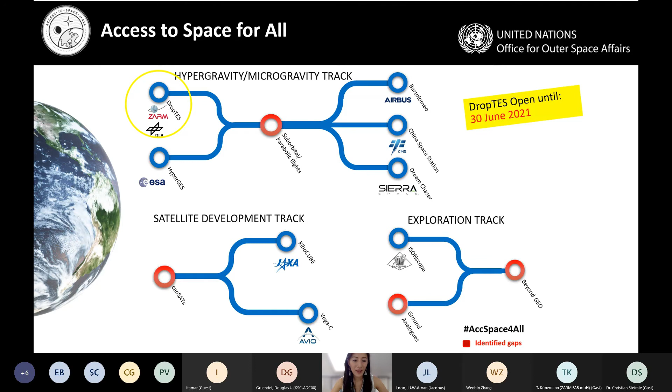So now I'd like to get into the contents of today's webinar. We will be introducing our 5 opportunities, and our partners will be giving us more details about that. I'd like to give the floor to our first speaker, starting with our ground opportunity. We will be beginning with DropTES. I'd like to give the floor to Mr. Thorben Könemann of the Center of Applied Space Technology and Microgravity, ZARM. So Thorben, you have the floor.

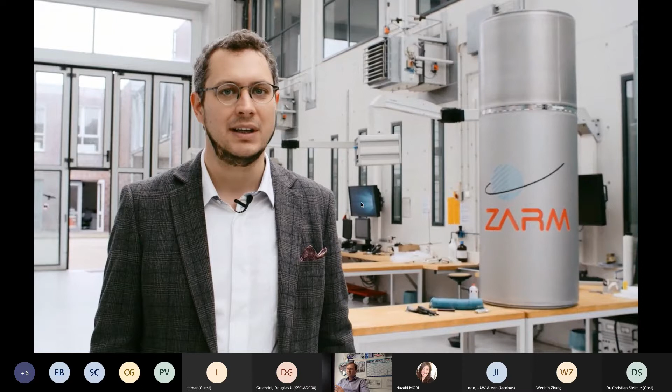Welcome to ZARM, the Center of Applied Space Technology and Microgravity at the University of Bremen. Here we are operating the Bremen Drop Tower, a large microgravity lab using the principle of free fall for experiments under conditions of near weightlessness. But how do we use free fall for microgravity research? What would happen if I had scales stuck to my feet and jumped from a diving platform into a swimming pool? It would show almost 0 kilograms because I'm in free fall. The only weight shown on the scales would be the result of the air drag.

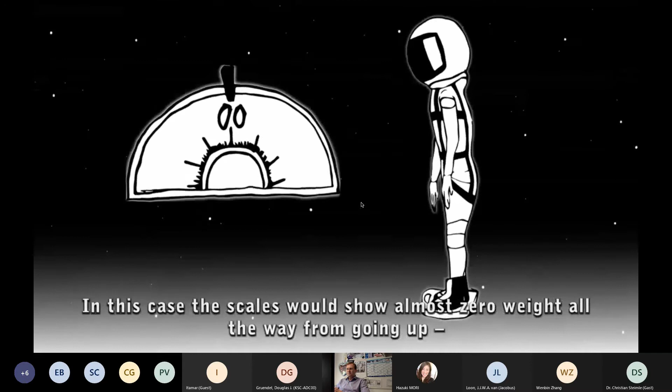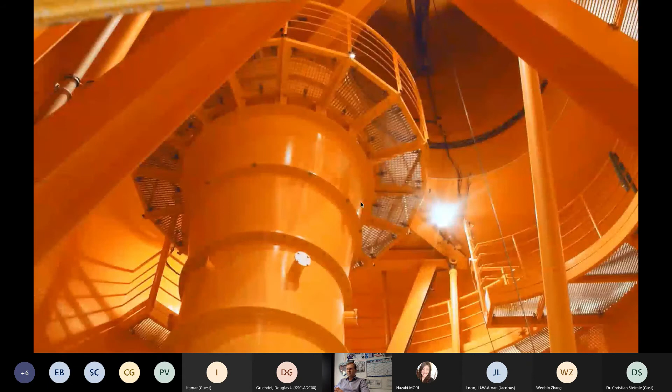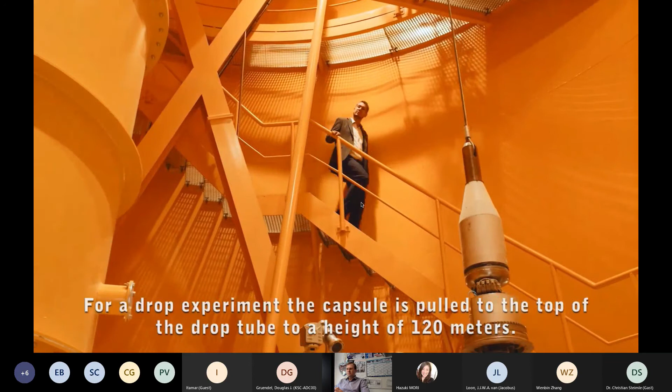We could observe exactly the same reaction of the scales if we were jumping on a trampoline. In this case, the scales would show almost 0 weight all the way from going up to falling down again on the trampoline. And now we will see where the microgravity experiments take place. For a drop experiment, the capsule is pulled to the top of the drop tube to a height of 120 meters. From there it drops for almost 5 seconds before it lands in a container filled with tiny polystyrene balls, like these.

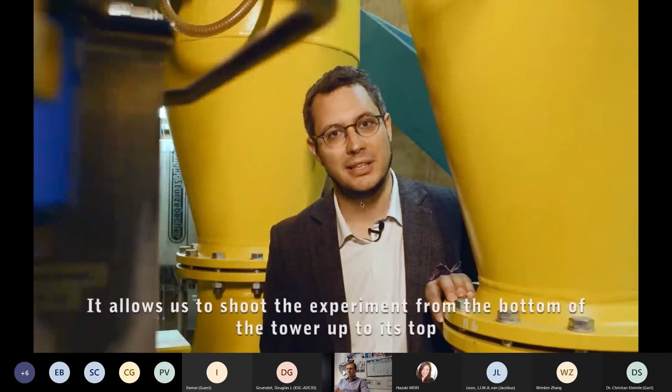The most extraordinary feature of the Bremen Drop Tower is the catapult system. It allows us to shoot the experiment from the bottom of the tower up to its top, from where it falls down again into the deceleration container. This way, instead of 110 meters for a simple drop, we can use a distance of 220 meters for free fall, providing a microgravity duration of almost 10 seconds, unmatched by any other drop facility worldwide.

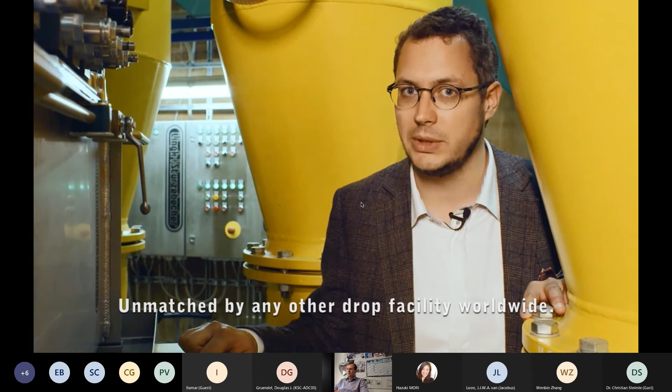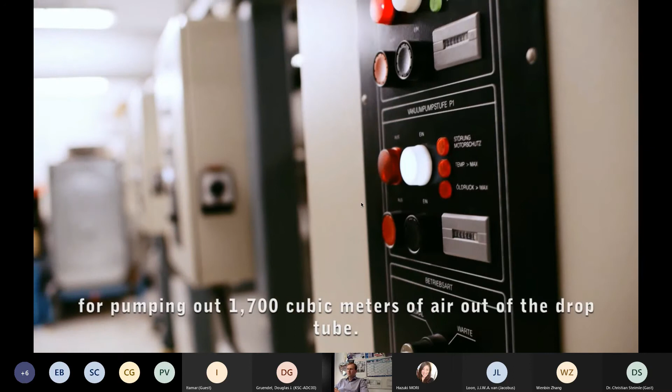Another important feature is the fact that the free fall takes place in a vacuum. It takes these vacuum pumps 1.5 hours for pumping out 1,700 cubic meters of air out of the drop tube. Thanks to this procedure, we can eliminate the air resistance almost completely and achieve a very high quality of microgravity. The experiment takes place in only 1/1,000,000th of Earth gravity.

Teams from all over the world and from all kinds of scientific fields come to Bremen to use the drop tower for their experiments. And the demand for experiment time is high. This is why we built another drop facility using a completely new technology which allows us to carry out hundreds of experiments every day. Stay tuned.

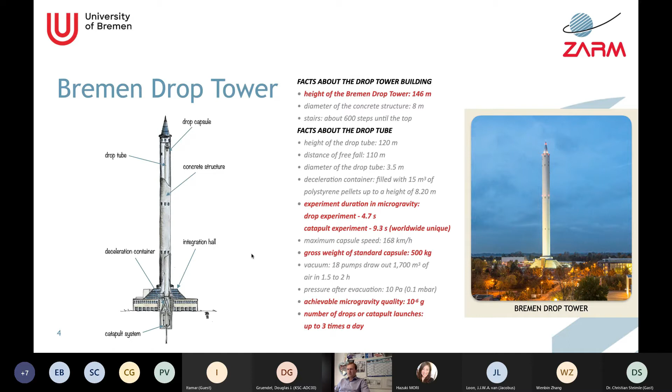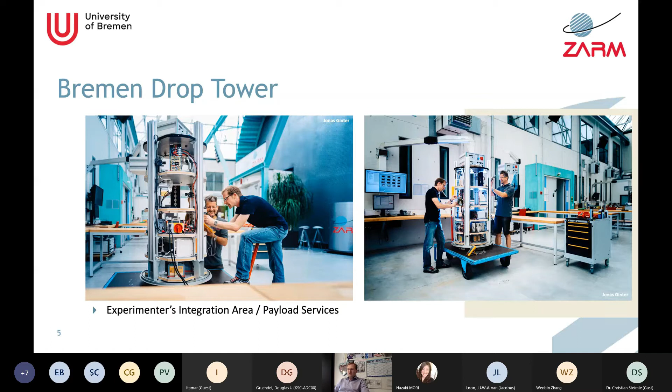What we provide you also is an integration area, tools, hardware and so on. The campaign usually starts 1 or 2 weeks before the first launch or drop. You arrive with your hardware, and we integrate your equipment into our capsule structure. We provide different platforms, and we mount your hardware devices on those platforms. This is our payload service. Each experiment is accompanied by one mechanical engineer and one electronics engineer, so you can rely on our expertise to bring your experiment into the right state for microgravity experimenting.

Here is an overview of the different versions of capsules we provide. They differ in payload masses and size. We have the short drop capsule and the catapult capsule, which differ only in the outer structure; the payload dimensions are the same, only the payload masses differ. And then the longer drop capsule with a larger payload area. Each capsule is equipped with our CCS, the capsule control system, a real-time computer system to give commands to experiments, and between the ground control station and the capsule we have permanent communication and telecommand. Each capsule also has a battery pack, since during the free fall you need power to experiment.

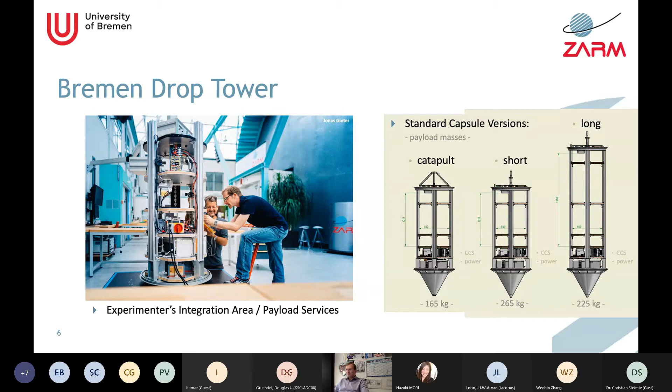An overview of the research areas and some facts and figures. We started with the Bremen Drop Tower in 1990. Up to now, we have performed almost 9,300 drops or catapult launches. A lot of different types of experiments have been integrated, and usually you have access to our facilities through our frame contracts with DLR and ESA. That means you write an application to those agencies, or you apply through DropTES.

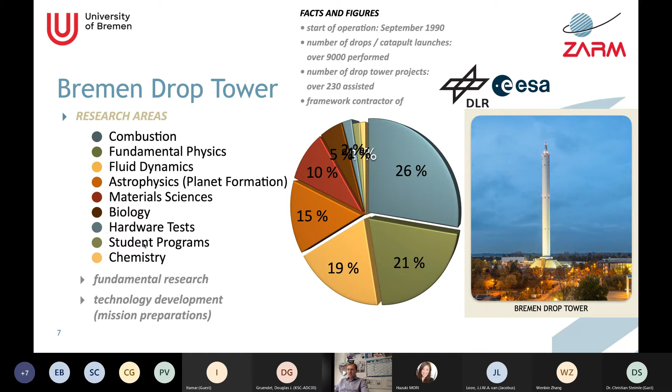Here are the different research areas. Nearly every research field is possible, mainly fundamental research, but also technology tests. They are sorted by the number of drops so far: combustion, fundamental physics, fluid dynamics, astrophysics, material science, which needs a little more microgravity time, as well as biology. Then dedicated hardware tests to prepare space missions, chemistry, and of course student experiment programs at the Bremen Drop Tower. We have Drop Your Thesis, a program similar to DropTES, which I'll talk about in a few seconds. We are also involved in REXUS/BEXUS, the European program launching rockets and doing balloon experiments from Kiruna, Sweden, where we are responsible for the German part.

As mentioned, DropTES. DropTES is a UNOOSA Access to Space for All initiative. It's an annual science activity at the Bremen Drop Tower, located in Bremen, Germany. It was first initiated in 2014. The 7th round is ongoing, and the call for the 8th round is open until this month. Involved are UNOOSA, the DLR Space Agency, and the hosting institution, ZARM.

It's dedicated to student research teams from UN member states. It allows a real microgravity research project, and the topics can be accommodated in the students' bachelor, master, or PhD thesis. DropTES follows space project guidelines, and most importantly, each winning team will have the opportunity to do 5 drops or catapult launches at our facility.

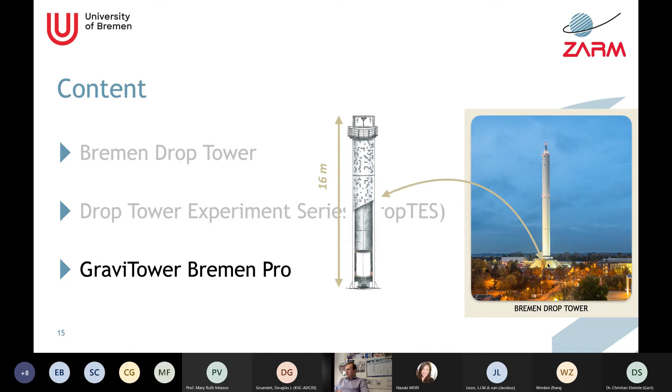Coming to the end of my presentation, I would like to introduce you to the GraviTower Bremen Pro, the next generation drop tower system, which is currently under construction in our integration hall. This is a 16-meter high tower, which is connected to the concrete shell of our drop tower and accommodated, as I said, in our integration hall. Here you see it. This new facility can provide over 12 experiments per hour. Due to the limited height of 16 meters, we are able to provide only 2.5 seconds of microgravity.

But this is an active drop tower system, a rail-guided system. For this, we use a rope drive with hydraulic winches to pull this slider or cabin up and downwards to achieve an acceleration phase, then the microgravity phase, when the capsule, a standard drop tower capsule, is detached inside the slider, and the deceleration together at the end. So you have a free-falling part with these 2.5 seconds.

Another mode is possible also with this facility, where if you have a clamped mechanism between the cabin and the release and caging mechanism, we call this device here with the experiment capsule, then it's also possible to achieve Moon and Mars parabolas, so-called partial G, so levels between 0.1 and 0.9 G. What I'd like to emphasize here is that the standard capsule can be used. So we have a lot of synergy effects with our drop tower.

That means, for instance, you can test the parameter in the morning, 12 times the hour in the GTB Pro, then identify the right parameter for a catapult experiment, for instance. Then you have 9.3 seconds in microgravity. So there's a high flexibility between all modes: drop mode, catapult mode, as well as GraviTower GTB Pro mode.

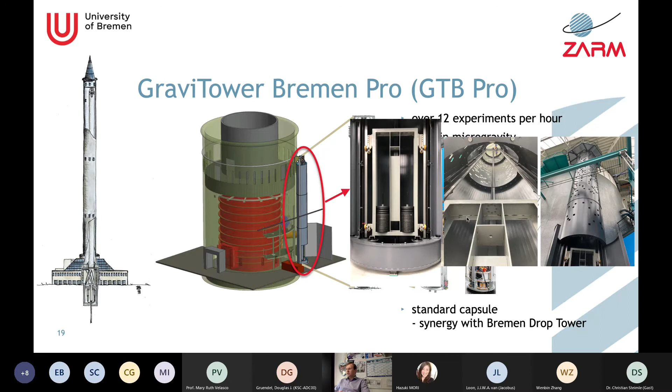What are our next steps? At the moment, we are finalizing the software, which is also very special, because scientists can operate this facility. You will get a control desk to operate the GraviTower on your own, so it's more or less a lab device for you. The slider and the subsystems are currently under manufacturing. You see here some parts, and this will be finalized in August this year. The complete tower will be tested in September, and we expect at the end of September and beginning of October that the tower is ready for the first utilization of external experiments.

I would also like to emphasize that first of all, we simulated all activities of this active drop tower system, and the drive dynamics are much better than expected, so we are very confident to provide you a very good system with less vibration and disturbances during the flight than you might expect for an active system. Also, this capsule is a free-falling one, so you have no influence from the rail-guided system.

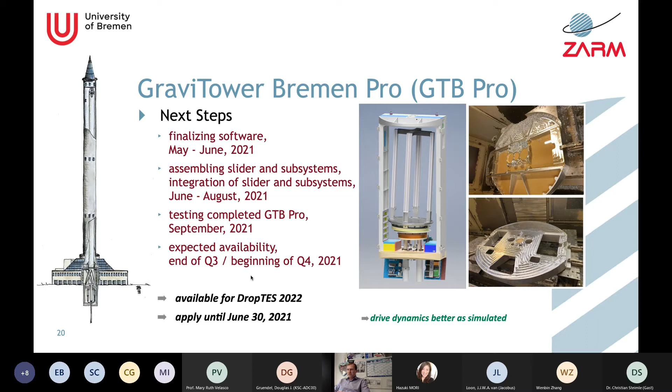Once again, this facility is also available for DropTES, so you can think about partial G experiments, for instance, and the high flexibility can be that you decide to do some tests in the GTB Pro, and you can also use drop or catapult launches from the 5-flight contingent you will get. So there's a lot of flexibility, and I must only say apply until the end of June, and we are looking forward to your proposals.

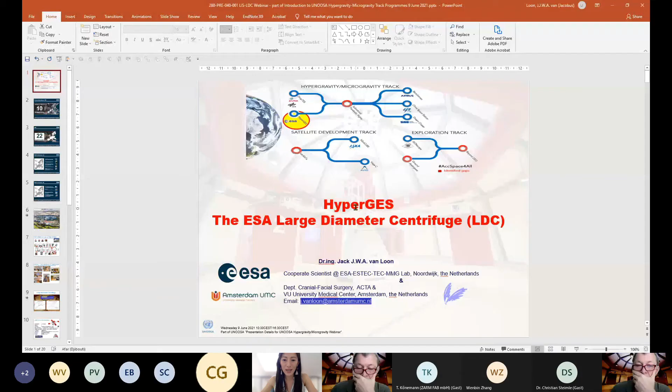I'd like to explain something about the HyperGES program and the ESA Large Diameter Centrifuge. I'm working for the European Space Agency and am also affiliated with the Free University Amsterdam in the Netherlands.

Something about ESA, the European Space Agency. It started off in its official form in 1975, with the 10 original member states signing up to ESA you see here in Europe. And then quite some years later, 2020, we have 22 member states, and it's still increasing as we speak.

ESA has various entities distributed all over Europe. Headquarters is in Paris. You have Earth observation activities near Rome. The Technology Center, which is the largest center of ESA, is in Noordwijk, the Netherlands. You have the Operations Center in Darmstadt, the Astronaut Center in Cologne, the Astronomy Center and Data Center also in Madrid, the Center for Commercialization and Partnership in Oxfordshire in the UK, in Belgium there's part of the ground station network for ESA, and of course the launch facilities in French Guiana in Kourou.

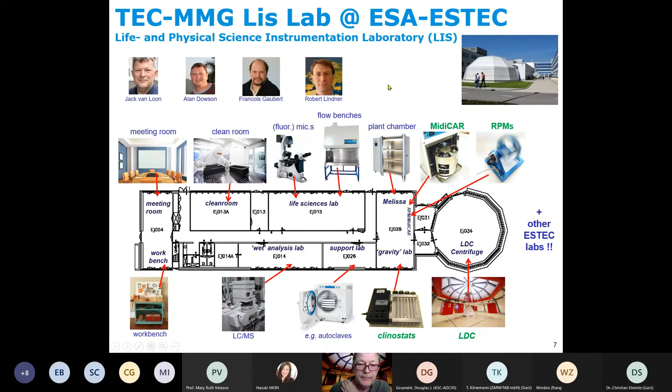These are some images of the actual facility. So the main lab with incubators and flow benches and so on, meeting room, the wet lab with various general lab items, the support lab, the fume hood here, freezers, coolers, chemicals, autoclaves, water, small workshop. Of course, the control room for the LDC you see at the back here, and the preparation lab for the experiments for the LDC.

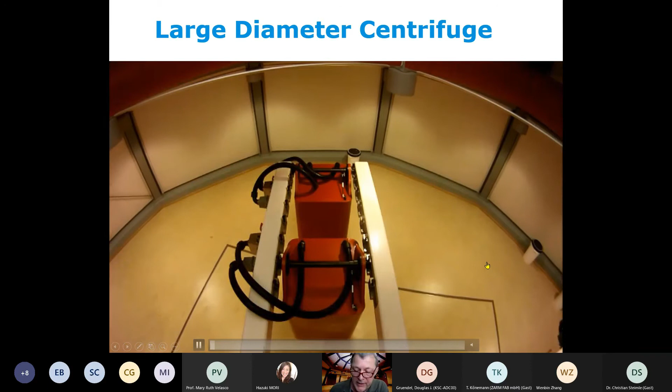The LDC here is an 8-meter diameter system, and the sort of experiments you can do is what I call the regular hypergravity experiment. So running an experiment at 2G, 5G, or 10G; we can go up to 20G. We can do launch simulations. We can look at, let's say, the hypergravity phase of parabolic flights, for instance.

But you can also do some more elaborate, or maybe sophisticated, studies to explore the gravity continuum. So to do experiments along the gravity scale going from microgravity all the way to X g, whatever the X is for your system. And you can use the centrifuge to explore this hypergravity part and use this data to extrapolate to lower gravity values, so to model and to see what you might expect if you go to lower G levels, lower than 1G. That's one way of using centrifuges.

You can also use centrifuges to simulate microgravity, although that sounds a bit strange. But you can do that based on what is called the reduced gravity paradigm. The upper part here is a regular spaceflight experiment where you are on Earth at 1G and you launch your system, and then you are under microgravity, and then your system adapts to this microgravity environment. So you have this adaptation here.

What you can do in the centrifuge is that you can adapt your system at the higher G levels, for instance 3 or 2G, and then you lower the G levels from 3 to 2 or from 2 to 1, and then again you have an adaptation of your system to this lower G. And this paradigm is especially applicable for life sciences experiments.

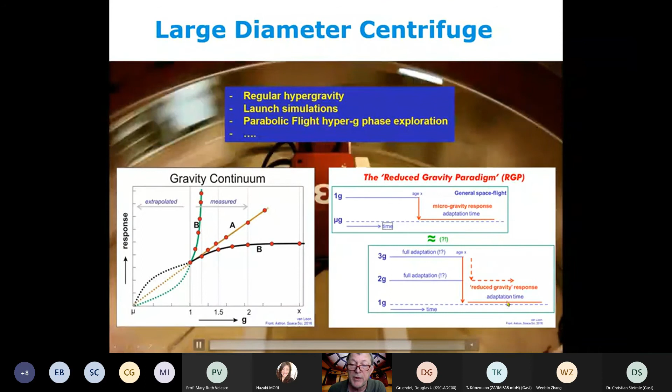But what is expected here is that you would have the same direction of changes in this reduced gravity paradigm as you would have under normal microgravity spaceflight conditions. So you can learn a lot on your system before going to actual spaceflight.

So the main properties of the large diameter centrifuge: it's an 8-meter diameter when full swing out, 4 arms you see here. We have various locations for gondolas. We have 7 gondolas, 6 on the arms and 1 central gondola for rotational controls. We have a swing out system, so the G factor is always perpendicular to the surface of your gondola. We can use 80 kilograms of payloads in each gondola. We can go up to 20 times Earth gravity, and it's a 22 kW motor to the system.

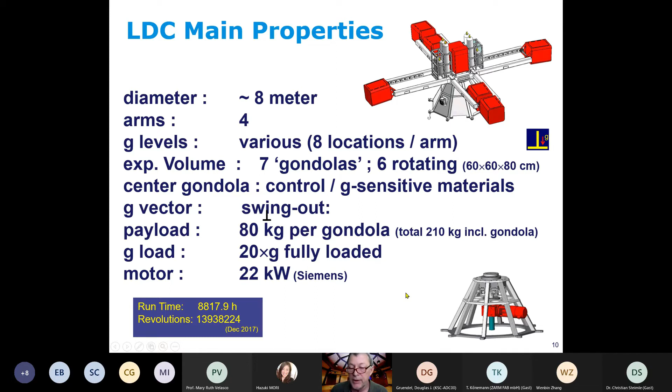Each gondola has a temperature sensor and a gravity sensor as well, but for the experiments we have analog video and digital video channels, serial communication channels, Ethernet channels, USB channels, power supply to the experiment. You can fix your experiment to various locations in the gondola, although most experiments don't need fixation. There are also gas and water supply lines if you need it for your experiment, for instance for cooling or if you have to apply a gas to your system.

This is to emphasize again that it is a swing out system, which means that the gravity vector is always perpendicular to the floor of your gondola, so of your experiment as well. And so in terms of integration, most experiments just stand on the floor on an integration plate, base plate, and they're standing very well at 1G and even better at 2G or even better at 20G. So for most experiments, it's not really needed to fix them, but you can if you want.

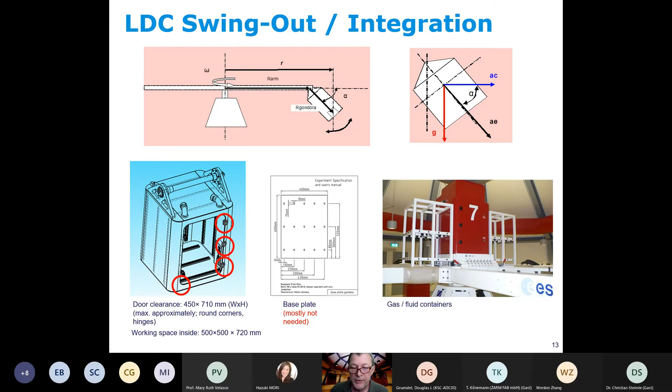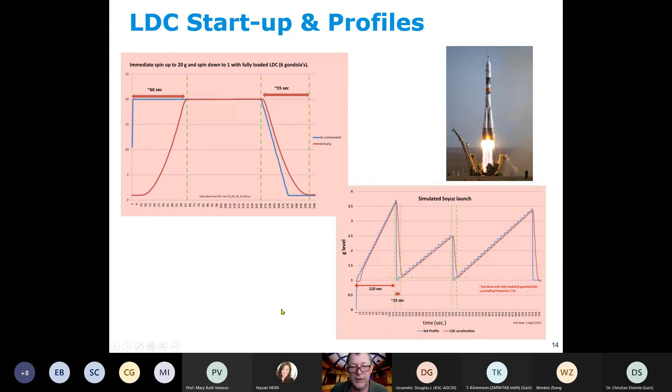This is a profile where we used a Soyuz launch. You see the various stages of that launch, and you can follow that with the LDC, so you can do a launch preparation experiment.

Although it's an 8-meter diameter system, and most of the samples are relatively small, the G profile of your experiment is relatively homogeneous, but there is, of course, within the gondola a gradient of your gravity profile. So the best place to put your sample is in the center of the gondola, so you have an even distribution of your gravity field within that sample and the most use of the large diameter of the centrifuge.

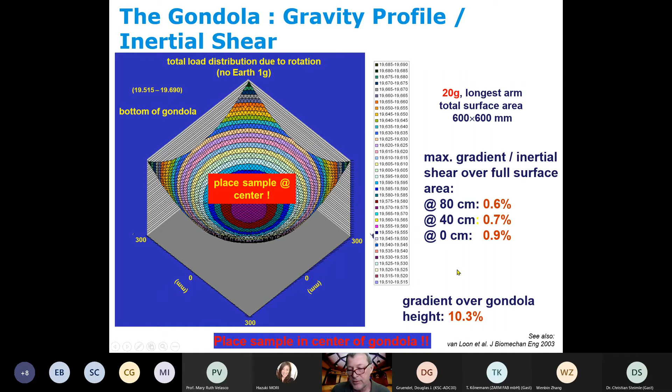We can, especially for life sciences, run incubators at different temperatures if needed. And then we can run these experiments for days or weeks or months, actually, if needed. For the HyperGES experiment, we have 2 weeks time, so in principle you could do a 2 weeks continuous experiment if needed.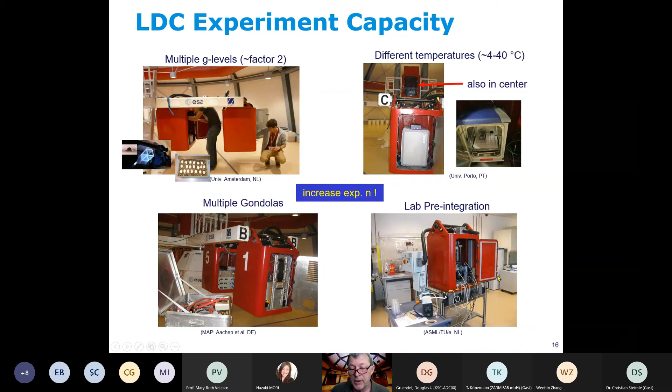Here's some examples of some experiments. Impact, where we had a sort of regolith, where we studied the impact of particles on this regolith at high G. That was from the University of Glasgow in the UK. We looked at neurovestibular processes in a crab. You don't see it here, but here's a small black dot, which is an actual crab, where we measured the vestibular system.

Together with Aberdeen, University of Thessaloniki, we looked into mass and heat transfer. There are quite some experiments done on mass and heat transfer under different gravity conditions, where the microgravity part is done in a parabolic flight or on the ISS, and the hypergravity part is done in the LDC. Planetary research, this is a model glacier, where you look into the expected behavior of glaciers at planets with a different gravity profile than on Earth. You can do model experiments on that.

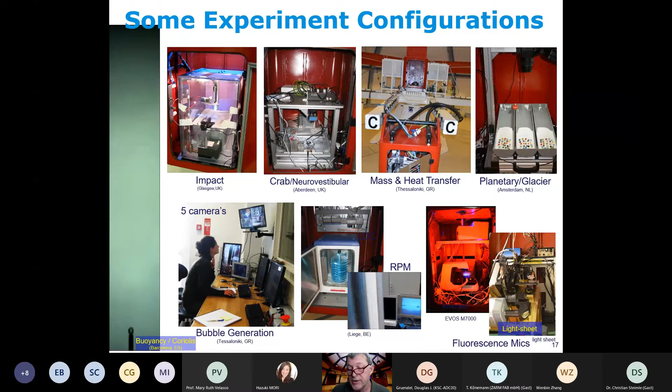Bubble generation, a lot of bubble experiments. What you see here as well is an image of a fast camera looking into bubbles and Coriolis effects. Here we used 5 cameras for this experiment. These are zebrafish experiments done at hypergravity, but also at simulated microgravity in a random positioning machine. And these are the 2 microscopes that can be used within the gondola, so at high G. One of them is a regular cell biological microscope, the EVOS M7000. The other one is a dedicated microscope for looking into larger 3D structures, a light sheet microscope.

As for a HyperGES proposal, what should be clearly addressed if you intend to send in a proposal to UNOOSA ESA for one of the coming campaigns. Make sure that it's very clear why you want to use the LDC. So for regular hypergravity studies or launch simulations, low gravity extrapolations, or this reduced gravity paradigm, the science and application background and rationale should be made very clear. So is there preliminary data either from your own or from literature? You have to refer to peer-reviewed papers on that, preferably.

How you want to use the LDC, identify the parameters you want to measure and how you want to measure them, either online or post-exposure, expected outcome and how to deal with that. Show the preliminary hardware configuration, so how do you plan to get your experiment accommodated within the gondola or in more gondolas. Think about the schedule and logistics, very important. There's not an unlimited amount of time. And also think about how to communicate your results, either in a report, preferably peer-reviewed science papers, conference presentations, and of course you have local and social media you can make use of. And before you upload, recheck all the parts of the proposal. There are various parts you have to fill out, so be sure you do that.

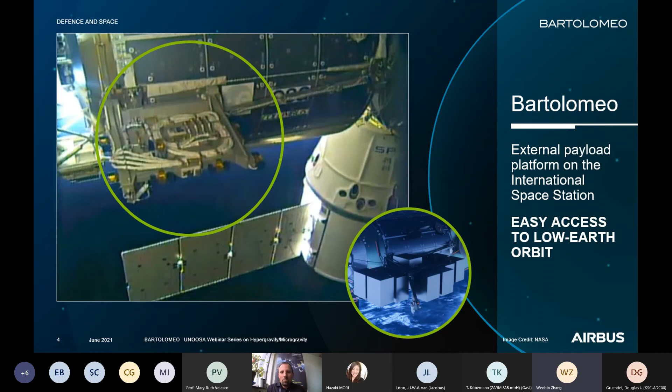Next slide, please. With Bartolomeo, every small to medium to large size payload can get access to space. This all-new payload hosting opportunity on the ISS provides very good viewing conditions, because we are really at the front porch of the station. The platform is designed to accommodate payloads in the range of 3 CubeSat units up to approximately 1.2 cubic meters, which corresponds to up to 450 kilograms in mass. So in comparison to a satellite mission solution, a really large payload.

We usually rent out the slots that you see here in the image. We have up to 12 slots on the platform. Usually we rent out those slots for 1 year as a standard, and provide all the mission services that are required to bring the payload to that location in low Earth orbit, alongside the renting contract. This is a very cost-efficient solution. We start at 300 kilo euros per year with an all-in-one space mission service.

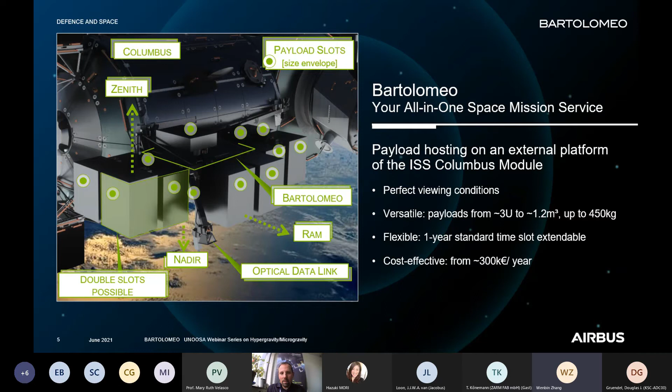As an evolutionary step, we have extraordinary data downlink capability. I will come to that later, but this is a cooperation with the German Aerospace Center that is providing high data downlink capability to all of our payloads.

So with Bartolomeo, the idea behind it is to provide all you need for the mission in one contract. This is a product offered in cooperation with the European Space Agency for European and worldwide payloads. For US payloads, we also have a further cooperation with NASA and the Center for the Advancement of Science in Space, or ISS National Lab, to use ISS resources for our payloads.

When you book a slot or a payload site on Bartolomeo, you get all the necessary mission elements that you see here. We launch the payload for you free of charge, because that's actually a service from the agencies. We do the payload transfer from the inside to the outside, because all the payloads need to be launched pressurized inside visiting supply vehicles that travel to the space station on average every 3 months. Once transferred to the outside, all our payloads are installed fully robotically using the available ISS robotic system.

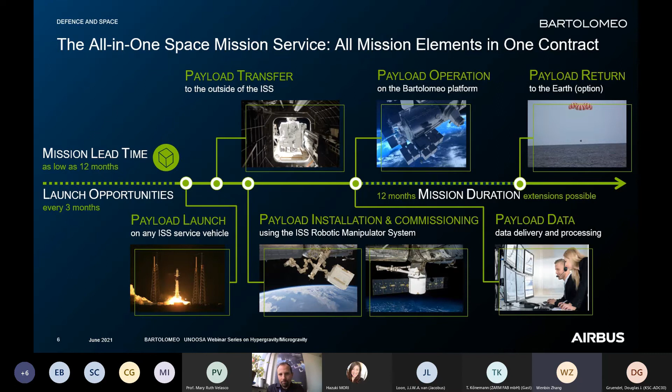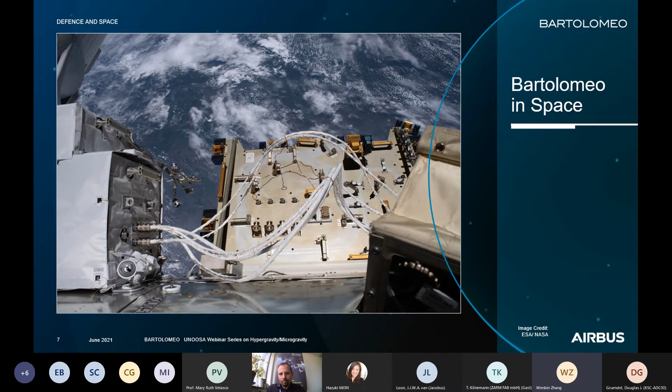So next slide, please, Wenbin. So the platform, as I said, has 12 standardized, really look-alike payload sites that can all be used in the same fashion using the same standard interface provided to us by the US company Oceaneering Space Systems. That's the so-called GOLD 2 interface, the General Purpose Oceaneering Latching Device 2. That provides robotics mating function, as well as the mechanical connection, as well as the electrical and the data connection, and can be mated fully robotically with an unlimited number of mating cycles.

And this payload interface, together with the platform design, allows several different payload configurations. So you can fly the payload as what we call a slot configuration. This is then you fly it as a 1A, 1B, 2A, 2B, etc. payload, or you can link two payload sites to each other to allow for a larger size payload, or a payload that uses just two slots for whatever purpose. That makes the whole solution very versatile. This is for medium-sized and large-sized payloads.

For small-sized payloads, we use the so-called ArgUS multi-payload carrier that you see here in the smaller image. This carrier uses a bit different interfaces, but it co-accommodates small-sized payloads in the CubeSat size range on one plate, hooks them up to a common avionics system that also provides 28 volts of power versus 120 volts commonly used on the space station. And this ArgUS, it's like the Greek ship traveling through waters. The name was selected on purpose because it brings together small-sized payloads, and through that co-accommodation we can reach a cost-efficient scenario here, where also the small payloads share ISS resources such as airlock cycles and robotics capabilities.

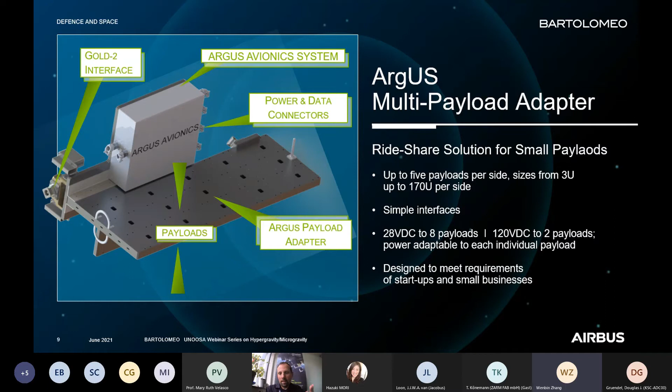Next slide, please. So here you see an overview of the viewing conditions on Bartolomeo, because a lot of use cases need a good view either to space or to Earth. And you see here a representative zenith and nadir view. What you see here is a so-called stereographic projection, or a fisheye view, if you will, of the nadir and zenith direction. And what you see is that, of course, being on the space station means that you see the space station in your view, and you also see other visiting vehicles, like you see here in the nadir especially.

But you do see a lot of Earth in the nadir and a lot of unconstrained space in the zenith, which is good enough for most of the missions. And since this is a low cost or cost efficient mission solution, maybe those viewing conditions are just good enough for your mission. And those are excellent conditions that we provide on all of our payload sites.

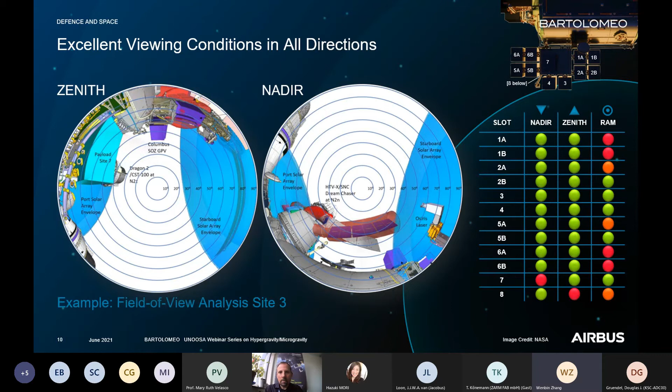Next slide, please. So here's again an overview of the different payload site configurations you may select. The so-called single slot is our standard. We have up to 12 of those, which can be operated all in parallel and can be reconfigured upon each ISS flight. The standard volume budget, if you will, which we give to all our single slot payloads, is 700 times 800 times 1000 millimeters, so really large size, which allows for any kind of use case you may fit into this volume. This can have a mass up to 450 kilograms, and this comes at 3.5 million euros per year, end-to-end, launch included, no additional extra cost.

Then we have the double slot solution. That is definitely larger. It's 800 by 1500 by 1000 millimeters per volume. It also has the 450 kilograms limitation, and it comes at 6.3 million euros per year. Again, end-to-end, launch included, operations included, no extra charge.

Or you go for the shared slot solution on the Argus multi-payload carrier, which starts at 3U or 4 kilogram payload and starts at around 300 kilo euros per year, depending on the mission complexity. So this is our portfolio, covering everything from very small to very large.

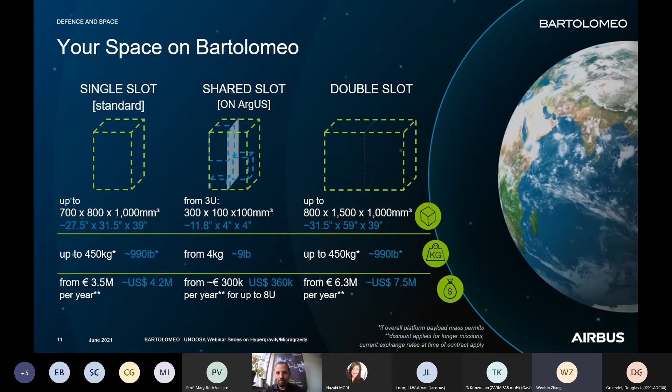Next slide. Yeah, now we come to the partnerships. I already mentioned the partnership with the European Space Agency, which is the basic enabler for this offer to the market. And based on this ESA partnership, we have also agreed with the United Nations Office for Outer Space Affairs on flying a 3U payload free of charge on one of our Argus carrier missions. And in fact, we are in the final stage of the selection process. So we are soon to announce our first winner.

This is going to happen presumably after the summer break. And we are, of course, very much excited to work with UNOOSA on such interesting missions. We have received a lot of proposals for very, very good missions. And the one that we are going to announce is also equally interesting and will be very unique. Next slide.

So I presented to you the Bartolomeo product, and we really are dedicated to make possible any kind of mission. We have here a selection of the most probable use cases you may think about. So starting with in-orbit testing, in-orbit demonstration. This is, of course, of high demand, because with Bartolomeo, we overcome the so-called valley of death for low readiness level technology. You can fly with us independent from your TRL to make a fast-track development of your technology. Among those are also Pathfinder missions. So if you're unsure or if you have to calibrate a certain instrument, Bartolomeo is the platform to go.

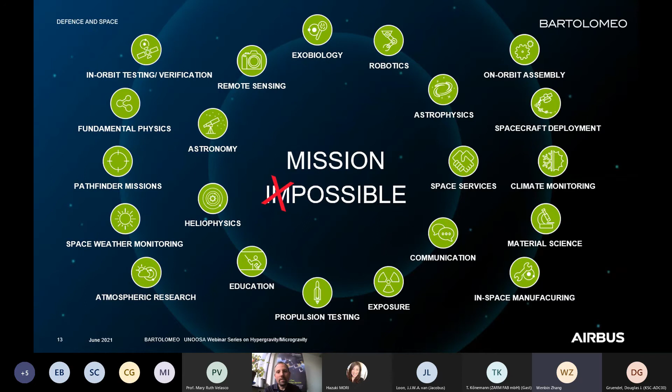We can think about even more. We can think about astrophysics using the zenith view, and even more exotic, on-orbit assembly cases where we can try out how to assemble or manufacture in space for maybe future on-orbit societies, future more complex missions towards the moon, for example. Next slide, please. So that should be another video.

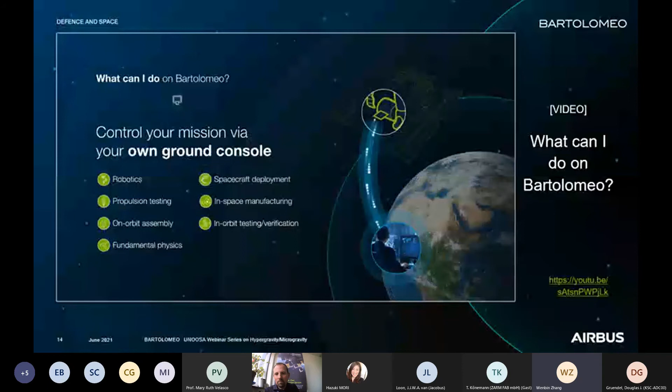Okay, so with that, I believe we are almost at the end of that presentation. So in summary, Bartolomeo is an all-in-one end-to-end mission service solution that is fully available to every one of you. We're happy to make any commercial contract with you based on our standard offer or based on a specialized offer. Airbus is here only renting out the Bartolomeo platform. We have no restriction on flying anybody. We have no interest in your technology. We fully protect what you're about to do, and we do that fully supported by the European Space Agency and by the National Aeronautics and Space Administration in the US for customers worldwide. So Airbus, we make it fly.

Thank you so much, Christian, for the overview of the Bartolomeo platform and about our program. As Christian mentioned in the presentation, we are excited to announce the winner very soon. We will put everything on our website, and we will probably have an announcement of the winner event. So please join us when we have that as well. So thank you so much, Christian. Very welcome. Thank you for your attention.

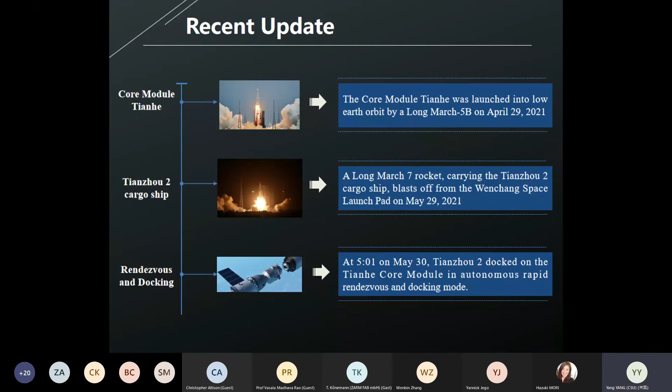You will also notice that in a couple of days there will be another very important launch, which will bring the first crew to fly on board the China Space Station. When construction is completed, the China Space Station will look like this, in a T-shape assembly. It is composed of 3 modules: the core module, experiment module 1, and experiment module 2.

For the transportation system, the Tianzhou cargo ship can upload up to 6 tons of logistic stuff and scientific hardware to orbit each time. And the Shenzhou manned spaceship can bring 3 astronauts on board and bring back 3 astronauts each time.

Regarding utilization capability, for the scientific hardware inside the pressurized cabin of the CSS, there will be more than 20 scientific experiment racks. On the outside of the CSS, for external scientific hardware, there will be more than 67 payload adapters. The altitude of the CSS is around 350 to 450 kilometers, and the design lifetime is more than 10 years. The general microgravity level is 10 to the minus 3 on average; with some additional technology, 10 to the minus 7 can be achieved.

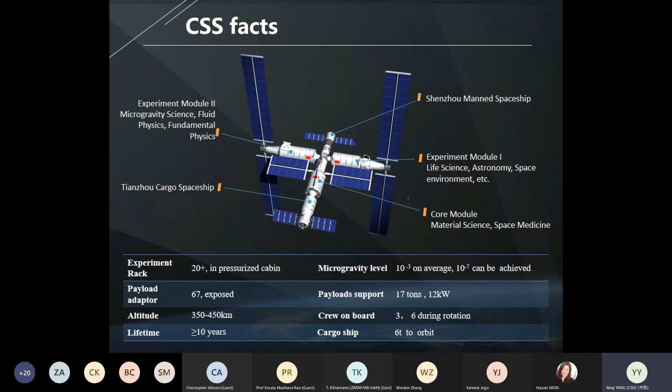The CSS can provide overall payload support for 17 tons of scientific hardware, and 12 kilowatts of power can be supplied to scientific research and hardware dedicatedly. Usually there will be 3 astronauts on board, and during the rotation phase, there will be 6 astronauts on board. And for the cargo ship, it can upload each time scientific hardware and also logistic stuff for the astronauts to orbit.

Various research disciplines can be supported by the China Space Station, such as space medicine, space life science and biotechnology, space physics and space environment, astronomy in space, fluid physics and combustion, fundamental physics, earth science, materials science in space, and also new technology demonstration. To better support these various research disciplines, a lot of scientific hardware is now under development or already developed for the China Space Station.

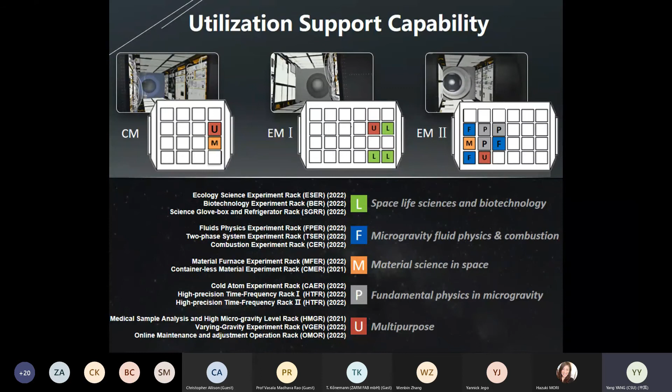This slide shows the experimental rack that we have flown on board the core module. We call it the containerless materials experimental rack. This rack realizes a special experiment environment through electrostatic levitation technology. It can support research on metals and non-metals in a containerless condition in a microgravity environment, so that it can explore the related solidification mechanisms and promote the development of new materials in space.

I'll go back now. As you can see, the experiment rack is composed of several components. The main part is the containerless experiment platform, which can hold the experiment samples. There's also a containerless vacuum and pressurization unit, and common support parts like the experiment controller and the liquid cooling thermal control unit. And there's some reserved space for future upgrades.

As you can see, each experiment rack can be treated as a highly integrated laboratory that provides a unique environment for research in certain disciplines, and also provides the human interface for operation in orbit by the astronauts. Okay.

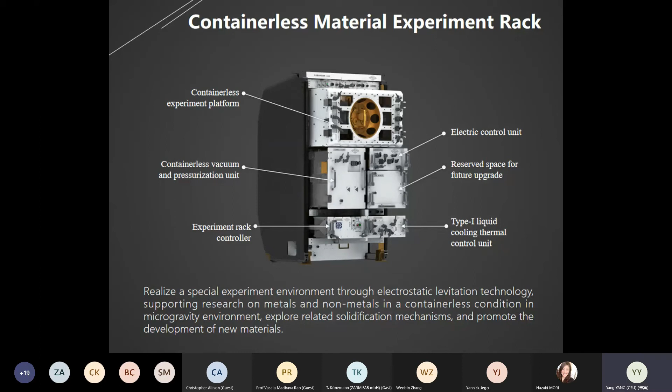Another experimental rack applied on the core module is the medical samples analysis and high microgravity level rack. For this rack, through the combined technology of magnetic levitation and jet levitation, the disturbance of CSS is isolated. That can form a microgravity level which can be 1 to 3 orders of magnitude higher than the overall China Space Station environment.

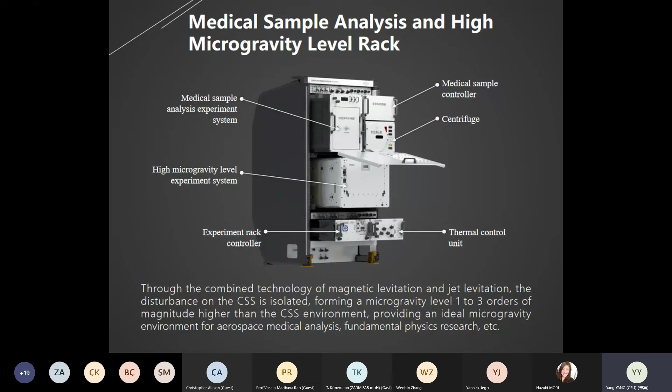So it can provide a much quieter environment for space medicine analysis, and also some research that needs a very quiet environment, especially research like fundamental physics, etc. Regarding the hardware, as you can see, there's a medical sample analysis system and also a medical sample controller. It is also equipped with a centrifuge. And the high microgravity level experiment system can, as I said, provide a double isolation capability and a much quieter environment for research that needs a high level of microgravity.

Okay, next one. Another kind of experimental rack we can call the modularized experimental rack. This rack is somehow just a rack, but it can provide the interfaces to support small-size scientific payloads, with different standard interfaces. The scientific hardware can be developed in the shape of SPU or SDU, and the interfaces can be compatible with the ISS payload.

And also, the rack can be made up of different combinations. So this modularized experimental rack can provide flexibility for small-size hardware. This can also provide potential opportunities for international cooperation projects as well as commercial projects. Okay. As I said, that's some experimental scientific hardware to insert in the pressurized module.

Well, the utilization capability is also extended to the outside of the module, what we call external scientific payloads. The integrated exposed platforms are built on experiment module 1 and experiment module 2. This can provide very standard mechanical, power and information, and also thermal control for exposed payloads. There are totally 3 large plus 67 standard hanging points on this exposed platform.

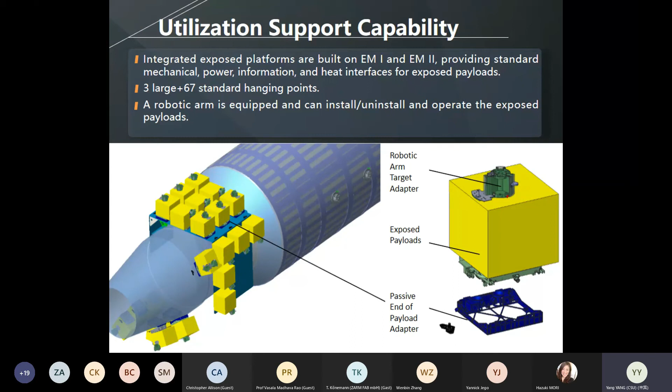Okay, next slide. There are now more than 1,000 scientific research projects waiting for flight on board CSS, among which there are a lot of international cooperative projects. Here we have a very long heritage and fruitful cooperation with UNOOSA. Within the first round, 9 scientific projects have been selected and approved to be implemented on board CSS, and the mission plan is still undergoing. In the future we will have a new round of cooperative proposals with UNOOSA and more joint selected projects within this framework.

Here I listed the titles of the cooperative projects already selected, and they cover several research disciplines like earth science, life science, biotechnology, fluid physics and combustion, space astronomy and technology demonstration. They are also from a lot of countries and nations. These projects are now undergoing, the teams are working together, and hopefully the projects will fly on board CSS in 1 or 2 years, when they're mature enough.

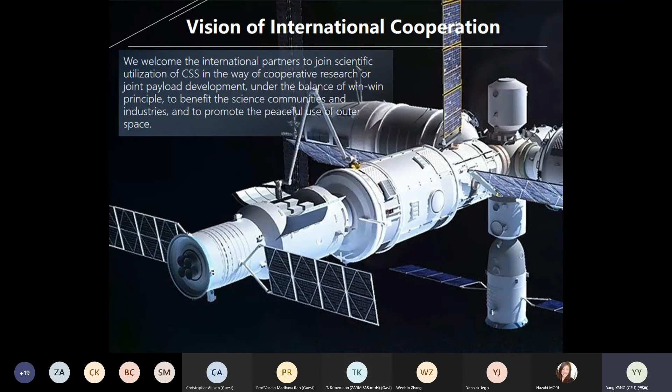Thank you so much, Dr. Yang, for this presentation. It's really nice to see the overview of the Chinese space station and also to learn about the updates of what's happening right now.

And I saw on the chat: will there be a CSS project again? Definitely, we are working with CMSA to be able to provide the next opportunity. As you saw, we had the first round with 9 winners, with a lot of international cooperation and different types of projects. We really hope to offer the second round. We're still in discussion, but please look at our website and we will keep you updated there.

Okay, now last but not least, I'd like to move on to our Dream Chaser opportunity. I'd like to invite to the floor Mr. Christopher Allison. He is joining us from the UK, actually, so not from the US, but the UK today. He is the Senior System Engineer of Mission Management at Sierra Space. So it used to be Sierra Nevada Corporation, but it is Sierra Space. I think Christopher will give you more explanation on that. So I'd like to give the floor to Christopher now.

And we see the presentation in full screen perfectly. Perfect. All right. And can you hear me okay? Yep. Great. Well, thank you, everybody, for joining today.

So as mentioned, I want to go over Sierra Space, our Dream Chaser space plane, as well as our space station overview. As was mentioned, Sierra Space is probably a fairly new name to this community. Formerly, we were the Space Systems Division within Sierra Nevada Corporation, and as of June 1st, so just about a week ago, we were carved out from Sierra Nevada Corporation as our own independent commercial space company. So what is included in Sierra Space is all of our product lines, personnel, and contracts that were under our Sierra Nevada Corporation Space Systems Group, and those are being transferred into Sierra Space.

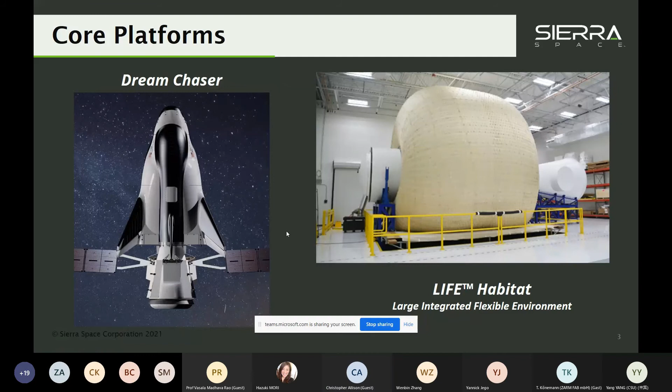So our approach, obviously we have our initial flights on Dream Chaser as part of our cargo resupply contract to the International Space Station starting end of next year. Prior to the end of the International Space Station life on orbit, we want to begin flying what we're calling free flyer Dream Chaser missions. And we have, since 2016, been in collaboration with UNOOSA in order to put together what we'll call a UN mission to fly payloads and experiments from non-spacefaring nations or nations that have limited access to space currently. So towards the end of ISS life, we want to start flying those individual free-flying Dream Chaser missions. And I'll go into a little bit more detail in a bit on the types of payloads that we can host on that type of platform.

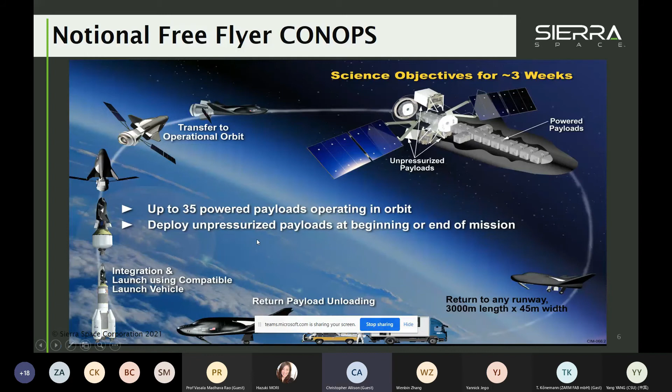And then as you refer back to the kind of concept of building up our station with multiple of these connected by nodes, you can start to see that we have really a small city in space, if you will. So the types of things that we can do here on the life habitat, we can host certain payloads like is conducted on ISS currently.

Again, flexible mission duration, we expect to have frequent opportunities to fly to and from the station. So that opens the possibility for rapid iteration on certain experiments where you get your hardware back on Earth, review something, make changes as needed, and then fly on a subsequent mission. So with the frequent access of vehicles to the station, we can also offer a flexible mission duration while hosted on the life habitat.

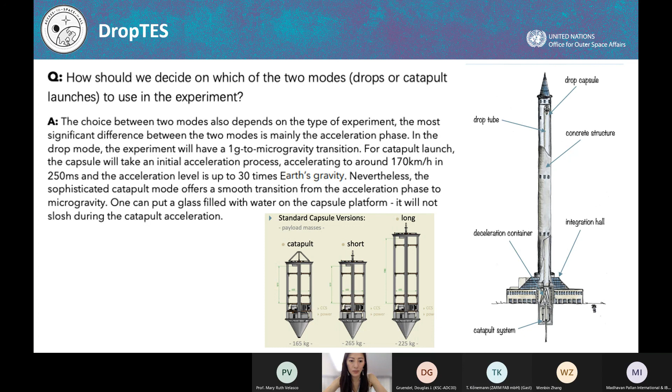From Madhavan, how many hardware models got damaged on impact in percentage? In percentage, I don't know, below 5 in 25 years or almost 30 years of operation. So the clue is that we drop the capsule in our deceleration container, and the deceleration force is up to 50 G. So that is not so much for hardware, and okay, for persons. So it's not allowed to drop persons, but if you would like to consider what kind of hardware is feasible to use in our facility, then you can imagine

once you can send your hardware via post delivery services, then you can always drop it in our capsule, because once you have a package in a wagon and in an airplane or so, you don't know how the people handle it, and this must withstand sometimes higher deceleration loads or G loads. So thus, I can say commercial hardware is feasible to drop. It depends a little bit on the mounting concept and on the design, but in this case, we will assist you, look at what kind of hardware you would like to use, analyze it and give you feedback on what is possible or not. Okay, thank you, Thorsten. I think that was a very clear answer.